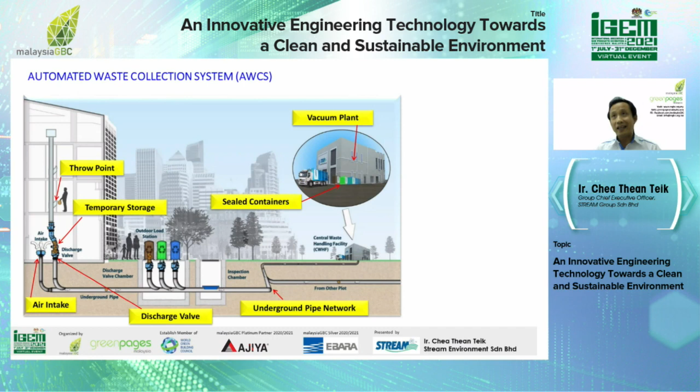Today, I'm going to introduce to you three common systems available in the market. The first two systems are very common, and this gravity vacuum system is the first system that I would like to introduce to you. This system has been in the market for at least 50 years. In Malaysia, the first system was installed about 20 years ago.

So how does this system work? This gravity vacuum system is usually recommended for residential buildings and office towers. The residents, cleaners, or tenants in this building will dispose of the garbage through the hopper door located at every floor.

The waste will be stored at the bottom of the chute. When it reaches the level sensor, the system is full, and the storage system's discharge valve has to discharge the garbage to the container. The vacuum pump starts running, creating a vacuum inside the pipeline. The waste will be transported to an airtight container, and the air will go through the vacuum pump and an air filtration system before being discharged to the surrounding environment.

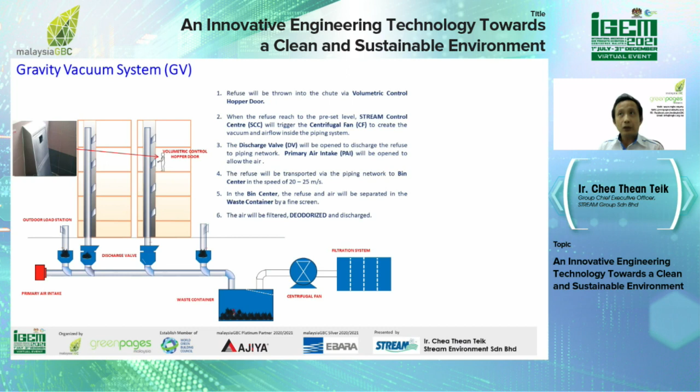Take note of the airspeed at item 4 here. The airspeed inside the pipeline ranges from 20 to 25 meters per second, which is equivalent to about 70 to 90 kilometers per hour.

The hopper door, shown in the top left corner, is a volumetric control hopper door, limiting the size of the garbage you can throw inside. There's a purpose for installing a volumetric control hopper door here, which I will explain later, probably through the Q&A session.

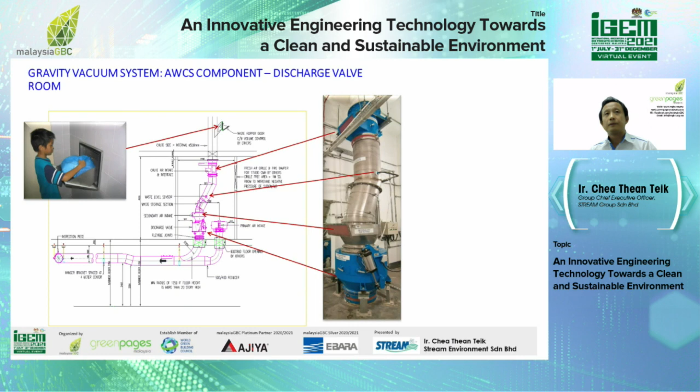The second system is usually known as a full vacuum system. Full vacuum systems are key operated, so the user has to be trained on how to use them. These systems are usually recommended in commercial buildings like shopping malls, hospitals, and airports. So how does it work?

The cleaner or tenant has to bring along a key to operate the system. When applying the key and turning on the system, it runs and the waste is sucked all the way to the airtight container in the bin center. Again, the air goes through the same process, through the air filtration system, and is discharged to the surrounding environment.

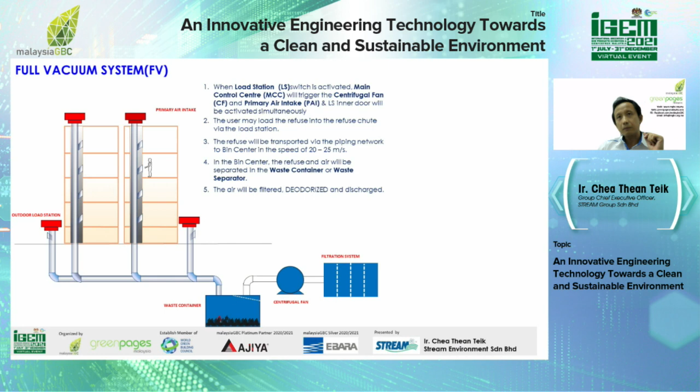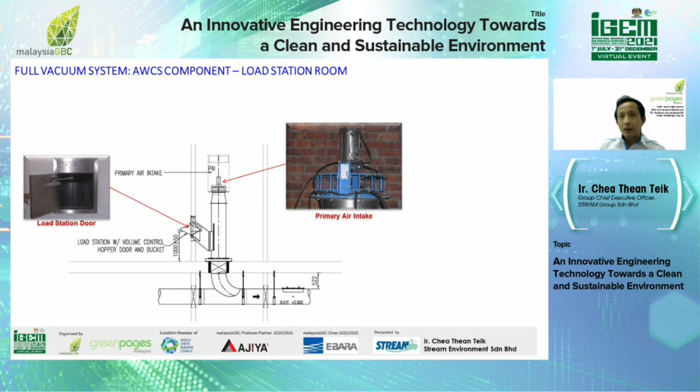This is the photo and drawing showing how the load station looks, with the outer door and inner door. On top of the station, you can usually see the air intake valve. This station connects to the waste transport pipe, which runs all the way to the container in the bin center.

The third system is called a vacuum shuttle system or waste shuttle system. Over the past 20 to 30 years in the market, data collected from government agencies and institutions shows that in the solid waste stream, 50% of the waste is wet organic waste.

Wet organic waste, when mixed with dry waste, which is usually recyclable, causes the entire waste collected to most likely end up in the landfill, because the dry waste becomes contaminated by the wet waste. The first two systems I introduced have a minimum pipe size of 400 mm diameter, 16 inches, so you can't extend the pipe all the way to the kitchen, because food waste is usually generated in kitchens, and it would end up mixed with the dry waste first.

But with the shuttle system, the pipe size can be as small as 100 mm diameter, meaning I can extend this pipe all the way to the kitchen area, at the kitchen sink or somewhere within the kitchen. This provides convenience to the user to dispose of the wet organic waste locally, to prevent this wet waste from mixing with the dry waste.

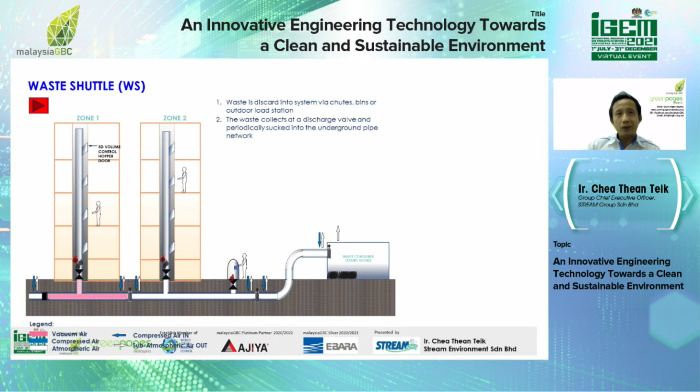So how does this shuttle system work? The general concept is still the same as the gravity vacuum system. The user will still have to dispose the waste into the inlet, where it is stored temporarily. When the storage is full, the waste will be sucked into the main pipe and stored in the main pipe temporarily.

And then once all the waste is discharged to the main pipe, we will create a vacuum through valve control in the waste transport pipe, and we introduce a positive pressure to push the shuttle. So you can see in the left corner, the shuttle is moving. The shuttle is actually being pushed by the positive air pressure. My apologies, the simulation here is a bit crumbled, so it's not so clear.

But once the shuttle pushes the garbage into the container, we will introduce a vacuum to retract the shuttle back to its original position. This system consumes 80% less energy compared with the first two systems that I mentioned just now. So this system is a second generation system. It's not so common at this moment because it's patented.

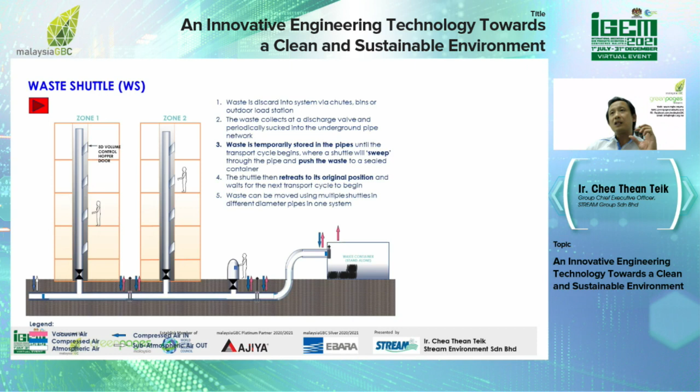And why did this happen? These leakages, the waste management issue that we are facing today, is not from the landfill. Landfills have their own problems, but the issue we are facing today is from the waste source, the point where the waste is generated before it reaches the disposal point. Between the generation point and the disposal point, there are so many leakages because of manual transfer, on-site segregation, and all this not being managed properly, or because of open bins.

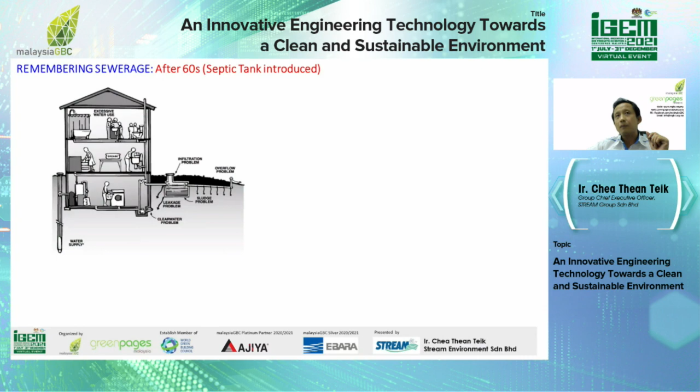And then after the 60s, we had septic tanks in every house. This guy with the truck would come to the houses every 2 or 3 years maybe, collect the sewage from the septic tank and bring it to the treatment plant. After the 90s, all buildings today are connected underground with the sewage piping network. Whatever business you do in the toilet, one flush and you don't see it anymore. Everything is gone.

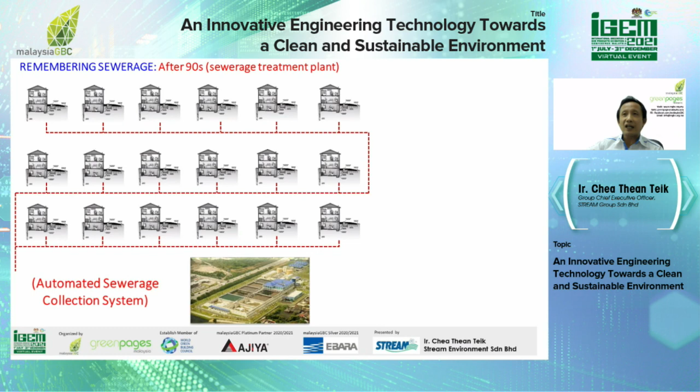So imagine this toilet in a shopping mall or in the conference hall. If you still had this guy coming here to collect the sewage from the toilet, can you imagine what kind of mess we would be in?

Since human civilizations, human activities produce 2 types of waste. One is the sewage, the waste from our own body, the toilet waste, and the other one is a solid waste. Today, this guy is gone. We already have the system addressing the sewage. The changes our forefathers made many decades ago allowed us to have this clean environment today.

But today, for the solid waste, we are still using the conventional way, the primitive way since many, many years ago. We are still using this method, collecting the garbage from the open bins, which is equivalent to a bucket in sewage systems. So solid waste management is still at the stage of bucket.

Again, coming back to this lobby, it looks very clean, very nice, looks very comfortable with aircon. You don't have this guy coming again to collect the sewage. You don't have this kind of environment today, so why are we doing this with the solid waste? I think this is very common. I think probably every one of you in this event will probably experience this.

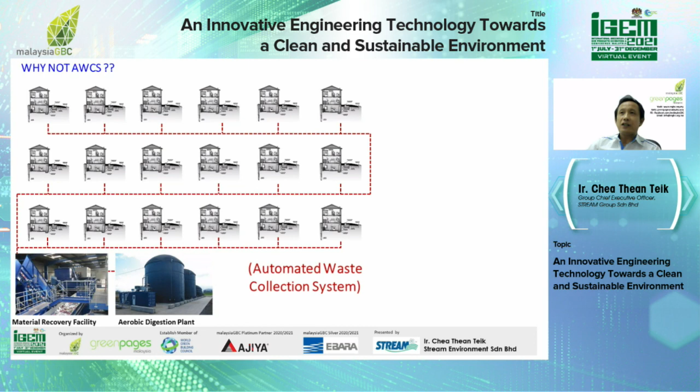With this in mind, if we are able to achieve this, then the zero waste that we have been talking about in the past few decades can be achieved. Okay, advantages and disadvantages of AWCS.

AWCS will require less storage space. Why does it require less storage space? Imagine the conventional system, the current way of handling garbage. For every block, the architect had to design a refuse chamber to store garbage. And every floor, you will have the refuse room to at least house the 240 liter mobile green bins. This room is usually 2 meters by 2 meters, and you have to provide this every floor.

By putting in AWCS, what you need to do is to install a 500 mm diameter chute, and you don't even need storage on every floor, because by the user throwing the garbage into the chute, it will drop by gravity, and it will be stored at the bottom of the chute. And once the storage section is full, the vacuum system will suck it away and bring it to the bin center.

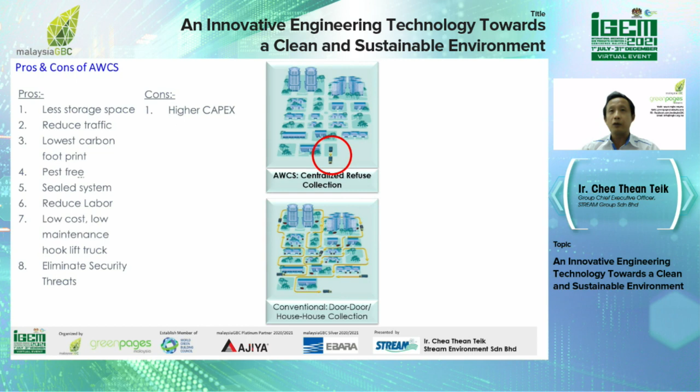So it's the same thing here. Why today does nobody question the amount of money we spend on toilet systems? It's become a norm now. But unfortunately, this AWCS is still new. And this is why we are here to introduce this product to our own Malaysians, because we have done a lot of projects overseas. As a Malaysian-based company, I think it's time to introduce this to ourselves in Malaysia.

Our neighbor, Singapore, is the first country in the world making AWCS a regulated, mandatory requirement for all HDB, the government housing development, and any private development having more than 500 dwelling units. It is mandatory to have these AWCS systems. Singapore is the first country to regulate this system in all residential developments meeting these criteria. And Singapore is the first country having a standard for AWCS, Singapore Standard SS642.

Coming back to Malaysia, AWCS is allowed and actually approved in the SW Corp guideline handbook under section 7.5, GBI under section 6 innovations, GreenRE section 5, and in Singapore, BCA Green Mark section 5 innovations.

So look at these utilities: water, sewage, power supply, transportation, and city gas. These are all infrastructure now. Can you imagine if today we were still using trucks to collect the sewage or supply the clean water? Can you imagine the city congested with all the garbage and water trucks? The city can't move and we can't expand. We can't accommodate more population in the city.

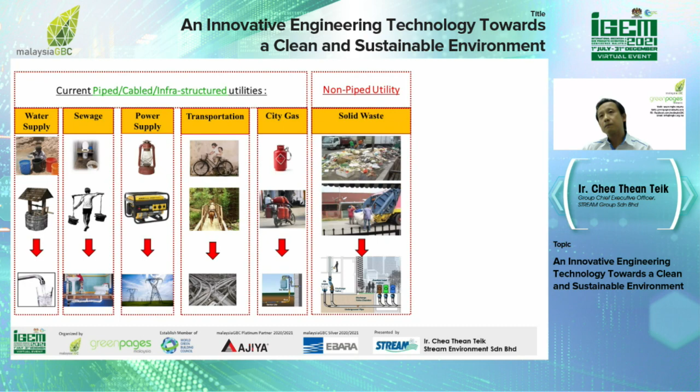We do not inherit earth from our ancestors. We borrow it from our children. Ladies and gentlemen, what is sustainability? In layman terms, for a layman like me, sustainability is when I take over this environment from my grandfather, I will have to hand it over to my grandchildren in at least the same environment.

So we have to ask ourselves today, we have been talking about sustainability today. So are we able to hand over this environment, the earth, to our grandchildren in the same situation, without garbage or with lesser garbage, as when we took over from our grandfather? This is something that we have to ask ourselves.

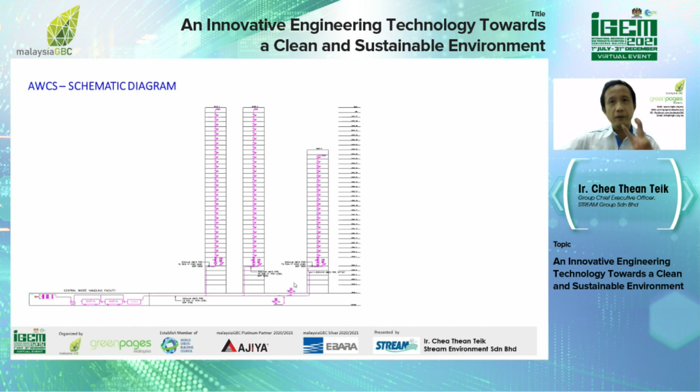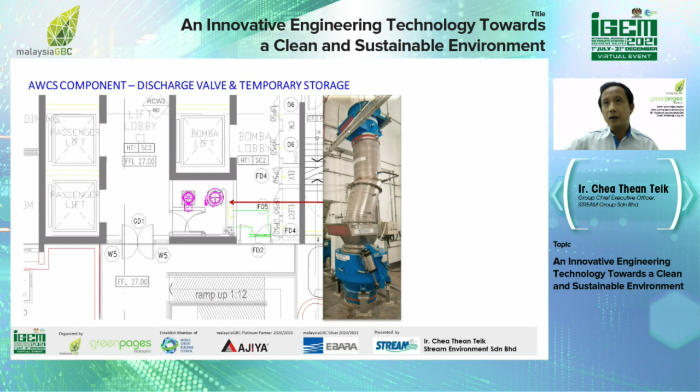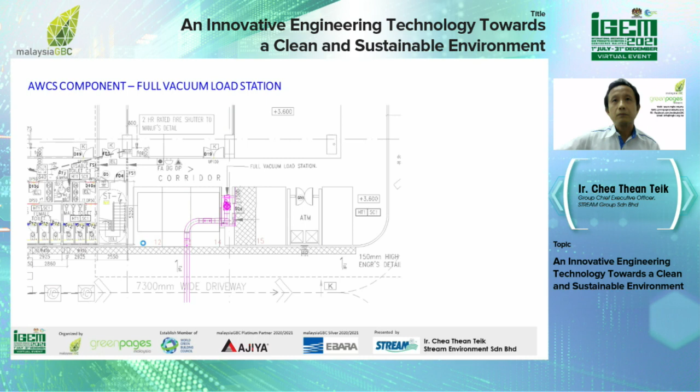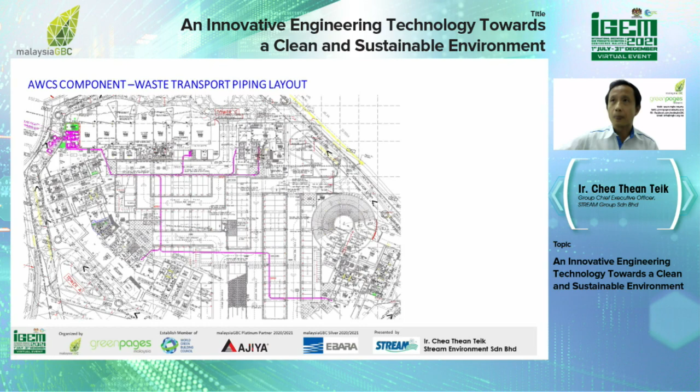This is the ground floor layout plan. The waste pipe is connecting all the 3 towers and it's running at high level of the ground floor. And you can see the bin center is located at the top left corner. And this is the bin center. For 1,100 units, a small bin center, 6 meter by 8 meter and height of 5 meter, to cater for the entire development, 1,100 units.

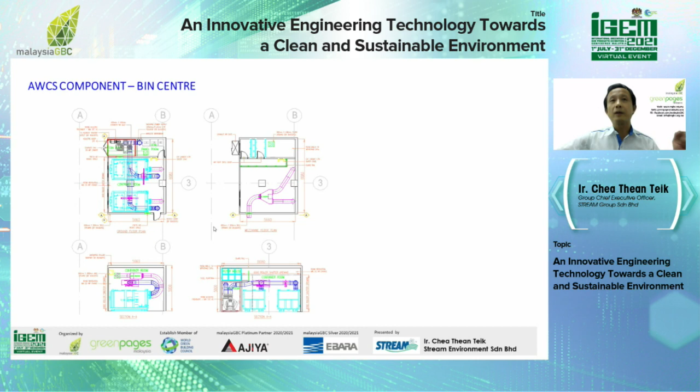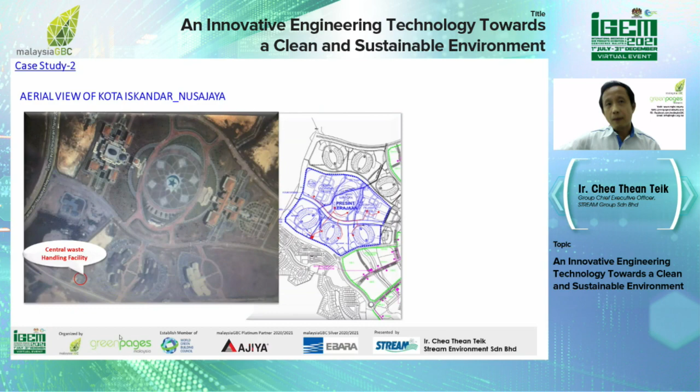Second case study, also in Johor Bahru. This is the government administrative center in Kota Iskandar. This blue color area is Kota Iskandar here. This entire area is served by one system, one bin center. So you can see this satellite photo. The bin center is located at this circle.

In this drawing, the pink color line is the underground waste transport pipe. The furthest station is located about 1.1 kilometer away from the bin center, somewhere near the Chief Minister office. And the bin center is at the left bottom corner.

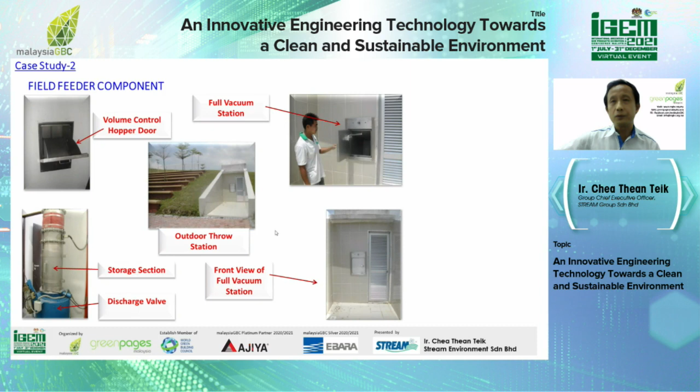So these are some photos of the disposal stations, the outdoor throw stations, and the discharge valve and the storage section at the bottom of the chute. This is the bin center layout. This bin center can manage the waste generated in the entire area with a capacity of 30 tons per day. This is the vacuum exhauster.

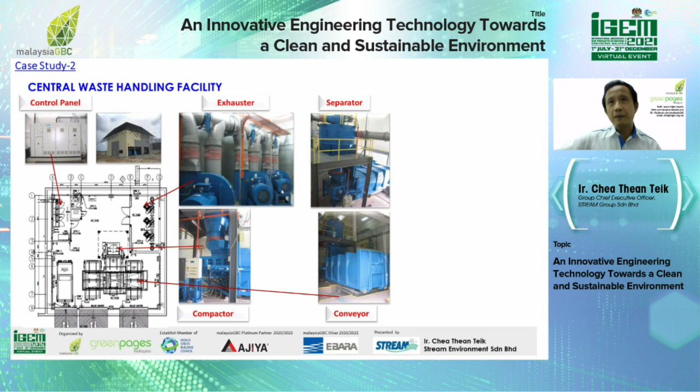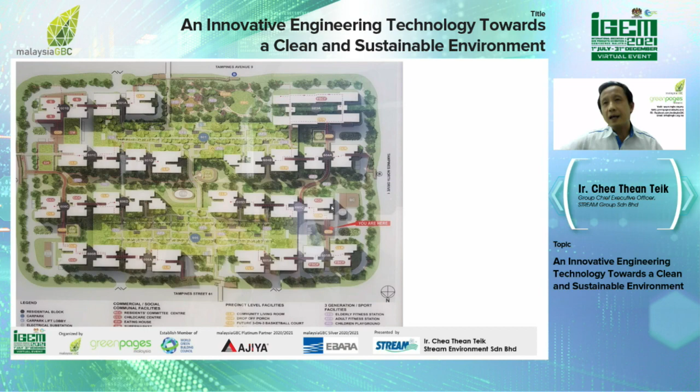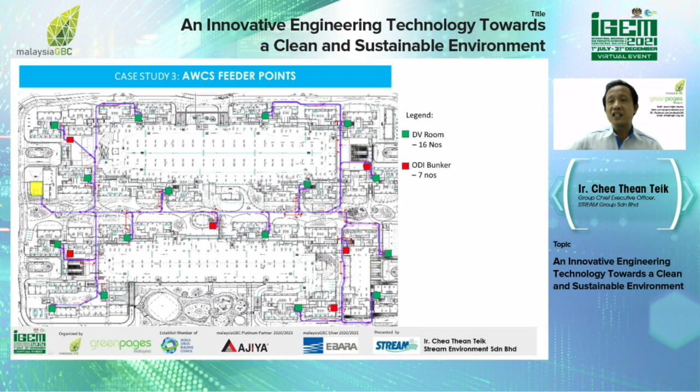The bin center is represented by this yellow box. So all the buildings, 32 blocks, are all connected by underground pipe to one bin center located at the left-hand side of this layout plan. So every block will have a chute and discharge valve serving every block and every chute. And then there are also outdoor load stations, outdoor disposal units serving the ground floor and also the public area.

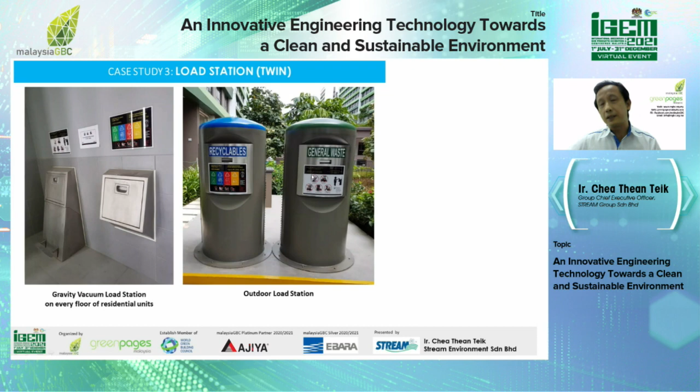And this is the load station. The left photo is actually on every floor in the residential block. So there are two fractions over here. The system is designed to handle two types of waste, two fractions of waste, the mixed recyclables and the non-recyclables. So the foot pedal type is dedicated for non-recyclables, and this hand operated one is for recyclables. And this is the outdoor load stations, recyclables and general waste. This is very common in Singapore now.

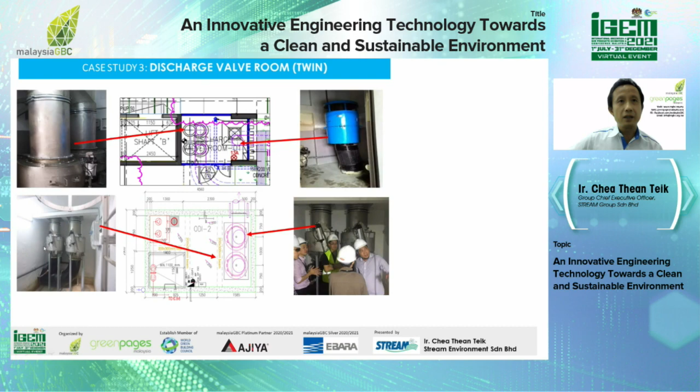So they don't have on-site segregation. So all the mixed recyclables will be conveyed, transported to an airtight container dedicated for mixed recyclables. And the service provider will come with the hook lift truck, collect this container, and bring this mixed recyclable to the recovery center to sort out all kinds of waste. And then the non-recyclables will go straight to the incineration plant.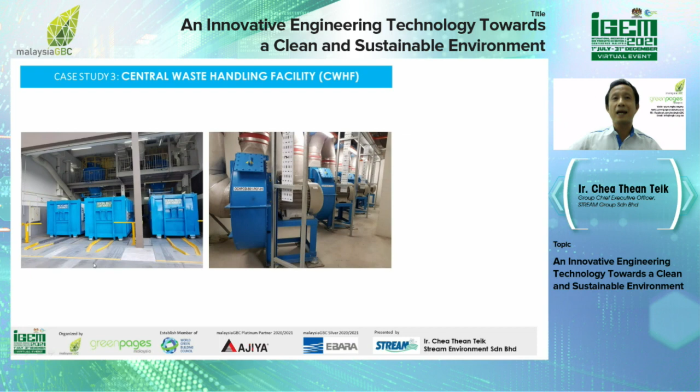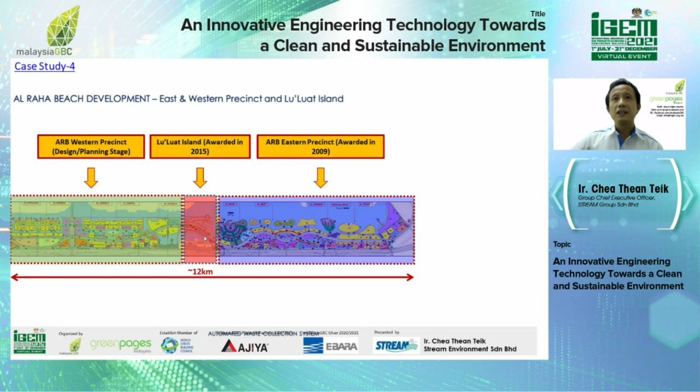The 4th case study is a project in Abu Dhabi. This is so far the biggest system in the world in a single contract. You can see this red color area here. This whole area, 12 kilometers, is designed with AWCS in place. And we have completed the first phase, the eastern precinct, about 5.5 kilometers. And then we are also in the midst of installing the underground pipe for the center portion here since 2015. So this is the eastern precinct, about 5.5 kilometers from one end to the other.

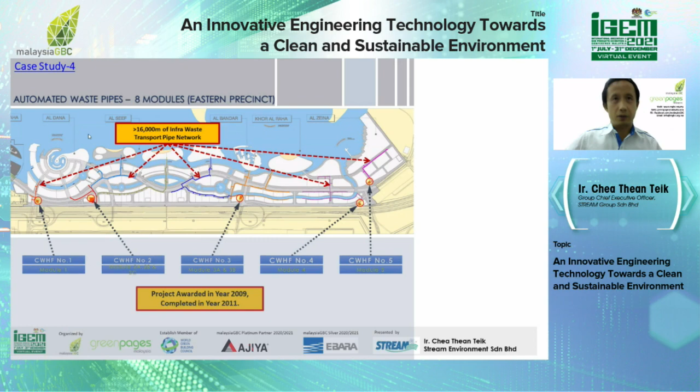So if you are familiar with the UAE, towards the right-hand side of the highway is the Dubai direction, and the left-hand side is towards Abu Dhabi. So along this entire stretch of development, we have already installed about 16,000 meters of underground pipe, getting ready to be connected to about 200 plots, sub-plots in this area. So you can see these different colors indicating different plots, different developments. So when the developer or sub-developer comes in to develop this particular piece of land, they will have to connect the building chute and also the waste transfer pipe to the infrastructure.

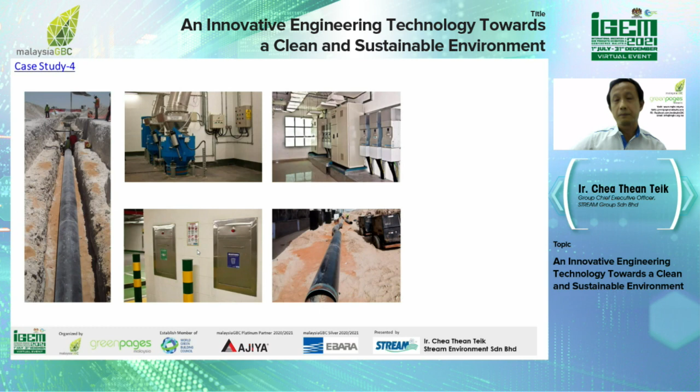These are the equipment in the bin center: the vacuum exhauster, the compactor and container, and the waste diverter. So we have a total of 5 bin centers in this development, serving 200,000 people.

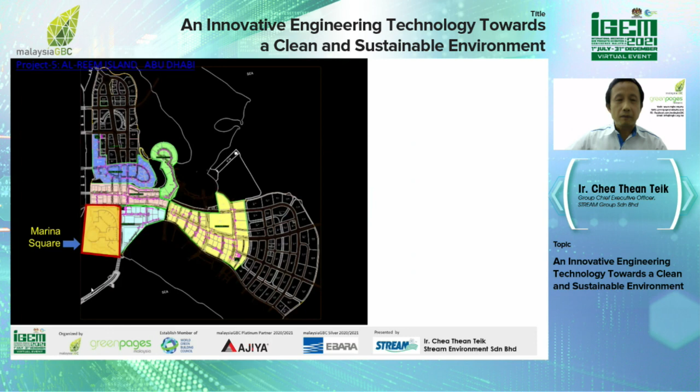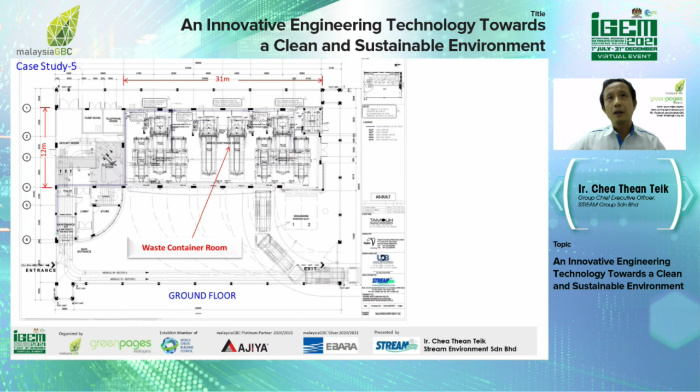So this is the layout of the bin center. There are 6 containers inside. You can see these containers here. And the bin center is located about 1.5 kilometers away from the furthest point. And the towers in the background are all connected with a chute all the way to the top floor, and then with underground pipe to this bin center.

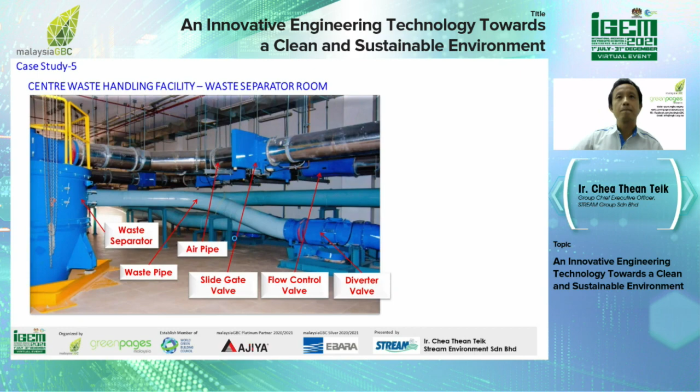These are the equipments in the bin center: the vacuum exhauster, and the compactor, this one with a conveyor. With this configuration, when one container is full, the conveyor will shift the container to this side, and then the container at the back will take over the position. All of this is done automatically by the computer.